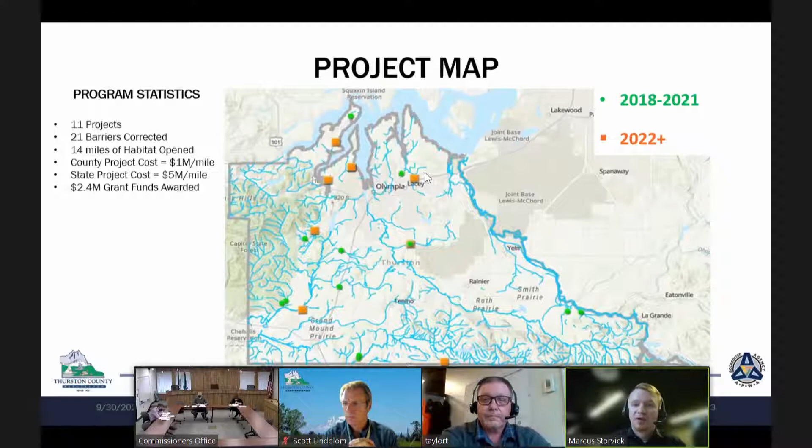We're going to jump into the 2018 to 2019 projects that we did. To give you an overview of what we'll be talking about, we'll use examples of a perch culvert, velocity barrier, and an undersized culvert on projects we've already constructed, to highlight the common problems we see across the county.

From 2018 to 2019, we were able to complete 6 different projects. The first example, as Trevin alluded to earlier, was a perch culvert at Hunter Point. You see Trevin standing down there underneath the culvert. That was a total blockage - there's no way fish can jump up through there, and this was considered a barrier.

That picture on the left is actually circling the same barrier you saw on the previous slide, but now you get a sense of the scale of the solution we came in with. This was Hunter Point, constructed 2018, and we came in with an 80-foot long prefabricated bridge.

The prefabricated bridge is a great solution for these perch culverts - one of our most favorite solutions, just because it allows a lot of daylight for the creek. These are great structures that last anywhere from 70 to 80 years. Great for low volume roads, which is a lot of these culverts are located across the county, and are just a great cost-effective solution for these problems.

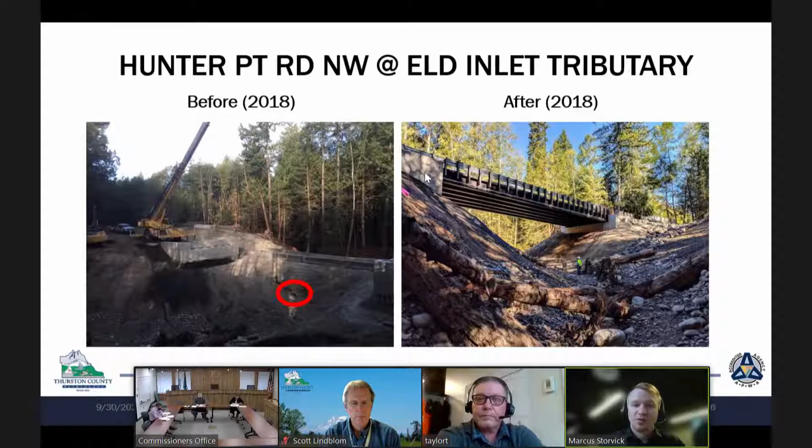Now, as Marcus alluded to, daylighting allows growth. Here we are in 2021, basically the same location, and now you can see the second growth that will someday become a riparian zone, just like the one behind the bridge. On the right side, I want to point out we had a great recruitment of natural alder that's going to help keep that bank even going faster.

And if you're aware of how fast alder grow, it's going to look much different even the next time we get to show you this presentation and an update of this site. Once again, I want you to notice that now, you might not be able to tell right away, but a lot of that material is now starting to recruit downstream, and wood and other materials are now getting into that stream.

And where I was standing previously, where all that sediment was, is now a great spawning gravel area. Now fish can also, at the right time of year, go up and down the system. So don't let the dry stream fool you - it's actually working the way it's supposed to. And how do we know that?

Before we get to that, one thing to point out is on the bottom right, you'll see the $1.6 million price tag. On all these projects, we'll be showcasing the total project cost - that's construction, design, right of way, everything that takes to get this project done. So in this case, $1.6 million.

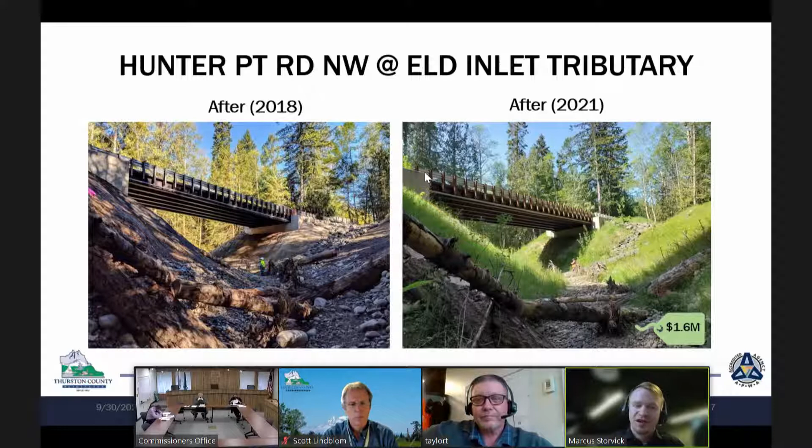But to go back to what Trevin was saying, here's that evidence. We have a video that a lot of you have seen before that is actually the first run of COHO salmon going under that bridge in 100 years. And we know it's over 100 years because we actually found the survey data from when it was filled in from the railroad. Now, this was my favorite picture, my favorite video that we'd show in this presentation, but I think it's surpassed now.

So what we're looking at now is mission accomplished. We're actually meeting the grandchildren, is what I've called this picture. What you'll see over Elena's shoulder is actually now upstream from Hunter Point, and what you see her looking at is a stream that has been created because that material can now properly go downstream. Inside that stream is rearing coho.

So the rearing coho are the offspring from some of those fish that we actually caught in the first year they went through the system. This is really about as good as it gets. Now, the beauty of that stream, it goes up into this wonderful wetland way up on top that has lots of diversity to it. So, like I said, you build it, they will come is one of the things we've said for a lot of years. And this here, we're going to have them coming for generations to come.

Moving on from Hunter Point, these pictures show the Peissner Road at Toboton Creek project, constructed in 2019. This is an example of undersized culverts. On the bottom left, you actually see three culverts lined side by side, which were the existing barriers, nicely framed in with the new structure. This was an open bottom aluminum box culvert, also called a three-sided structure because it has no bottom.

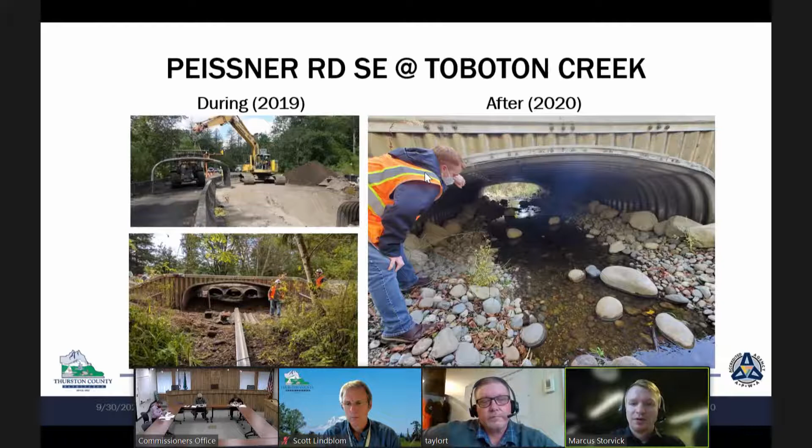Here's a great shot for before and after. Two years later, it's a really ugly looking picture on the left, but on the right you see that vegetation is already starting to establish. The creek is still flowing, and it's just really coming together nicely.

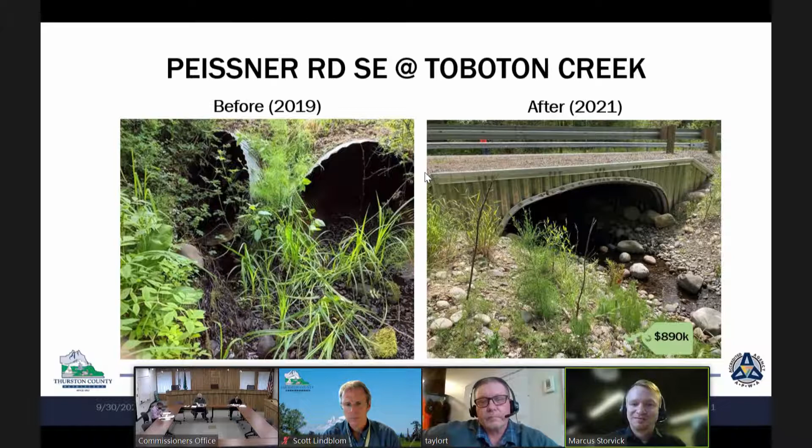So, velocity barriers. This is Waddell Creek, one you've seen before. The picture is actually taken from a video. Due to restrictions on Zoom, we've tried to show the video before and it's chopped up. But Marcus, in the red there, you can actually see a full-size coho trying to get upstream.

This is a full-size fish during high flood. Scott Lindblom caught this years ago, and as the story goes, he didn't even realize he had a fish in the picture until he got it back on the computer. This video has been pretty famous — we've shown it from California to Washington. In the video, the fish tries to hit that water, gets blown backwards onto the rock, and there's basically a mass of white water.

The other problem with undersized culverts like this is that we end up with a backwater, which can then create flooding, as happens here at Waddell Creek from time to time. That water then goes over the road and can transport all the materials from the road into the stream. So we get fixated on fish a lot, but these projects can lead to some great water quality fixes as well, and this is an example of that.

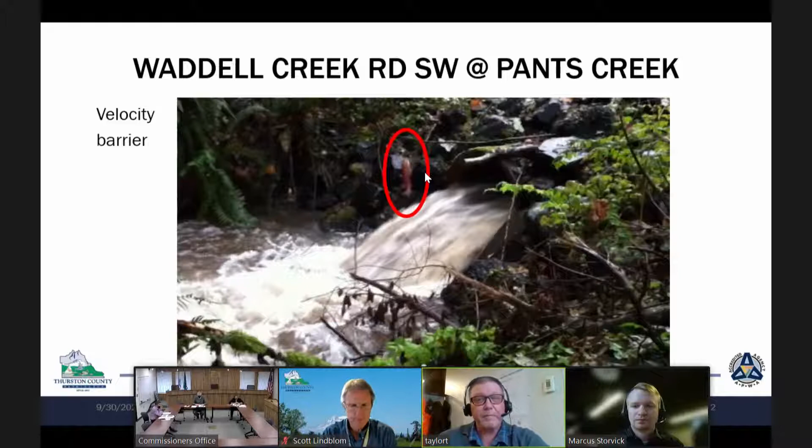Now, same exact flood scale, but this is with the new culvert we put in. This is aluminum — the first aluminum culvert actually put into the county. It has a hard bottom due to soils; Marcus will talk a little more about that. But the fact is, now you can see that the white water, the boiling water from the sides, the velocity is down. This is the same exact flood level now with the new culvert in place.

And once again, no water going over the road, and fish can go back and forth. Happy to report we have fish rearing upstream of this site as well.

Another mission accomplished here, and you can start to see the before and after — this is actually the exact same angle shot. You can see the light pole in the background there of the same angle. As Trevin was mentioning, in this case it was a four-sided structure; we like to find the right structure for each site. In this case it was a soils issue, and the four-sided structure allows a little more stability. So you can see we provided three different examples: a prefabricated bridge, a three-sided culvert, and now a four-sided culvert.

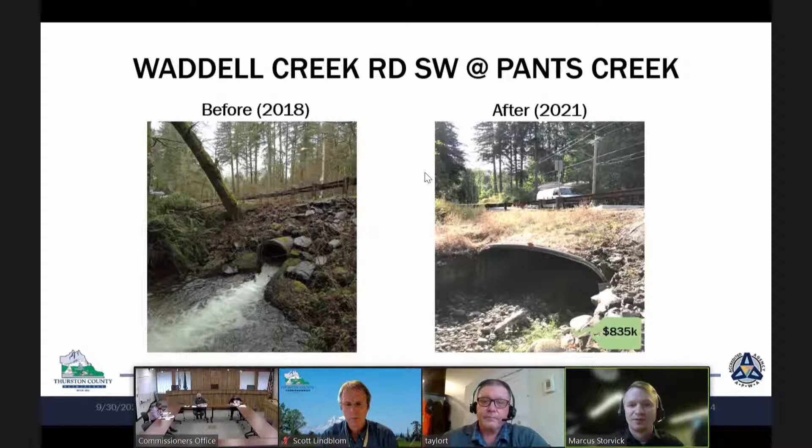Moving on, a quick overview of the 2020 construction season. We were able to complete three different projects last year. The first one up was Peissner Road at Elbow Lake Creek.

This one was a velocity barrier there on the left. It also recruited a lot of sediment and material upstream that was not able to get through. This was another great opportunity for us to come in and do a prefabricated bridge solution, 60 feet long, there on the right. Another thing to point out with this project is we actually received, I believe, an $80,000 grant from the Nisqually tribe. So you'll start to see that we try to leverage as much REAP funding as we can to get additional support.

The other project last year was the Case Road at Beaver Creek tributary. There on the left, you see our model, the traffic engineer, Matt Unsman, pointing to a pool of coho that are just downstream of that existing barrier.

You can see the rebar poking out of that concrete culvert. It's broken and prohibiting the passage of fish upstream. On the right, from the same angle downstream, is the new 16-foot wide open bottom culvert we replaced it with. We got a $500,000 grant from the Fish Barrier Removal Board, and this project has already received a general contractor award for excellence, with a nomination for an additional award. We hope to get this one on the trophy shelf soon.

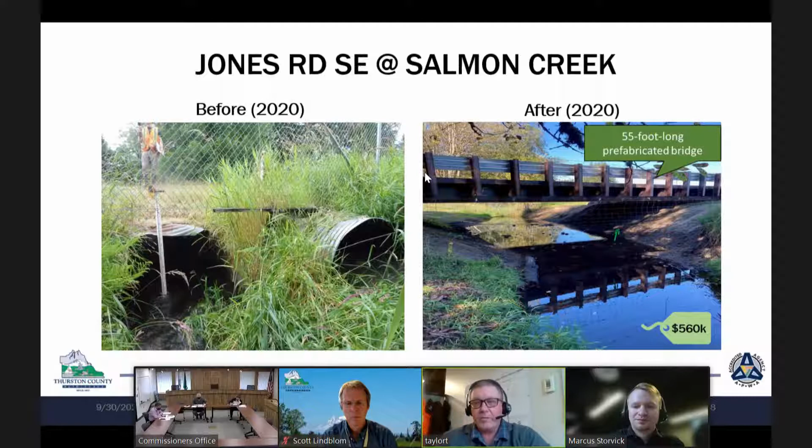Once again, this is one of our prefab bridges. They have a lifespan of 50 to 75 years. We call this site 'Don't Judge a Book by its Cover.' We knew we had anadromous fish there, but it had another story waiting for us that we did not really expect.

When we find something like this, we have to do some adaptive management. The old way of doing things was just to throw in more salmon gravel and try to make spawning ground everywhere. If we were to do that, we would actually limit that priority species. For instance, the Olympic mud minnow, we would create less habitat for a species that needs it.

In this case, we had very viable habitat, found it to be an extremely productive stream, and it really surpassed all our expectations. I actually moved fish daily for about 2 weeks because they were so aggressive about getting back into the site. Pretty amazing little side story that we didn't expect.

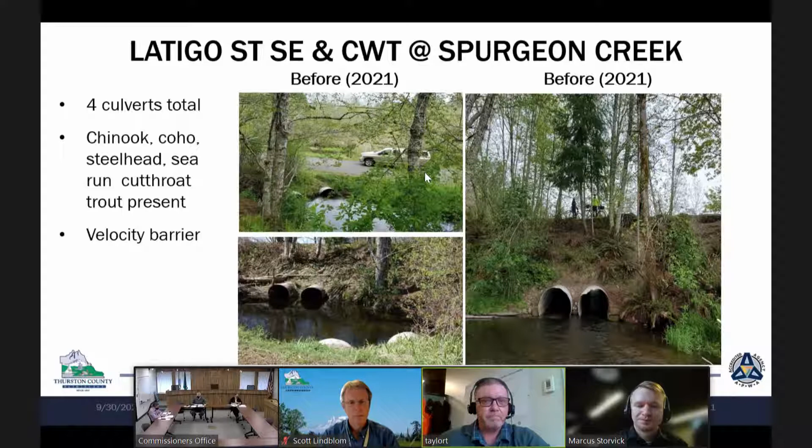I wanted to make sure we got a good shot of the scale of the culverts. Back on Latigo Road, you see the 2 culverts that will come out next summer when we do phase 2 with the 65-foot bridge, to give an idea of the scale of what the stream will look like and the opening it will create for fish and other species. We'll get a really good shot next year standing on the county road looking downstream, and you'll be able to look right underneath that trail bridge.

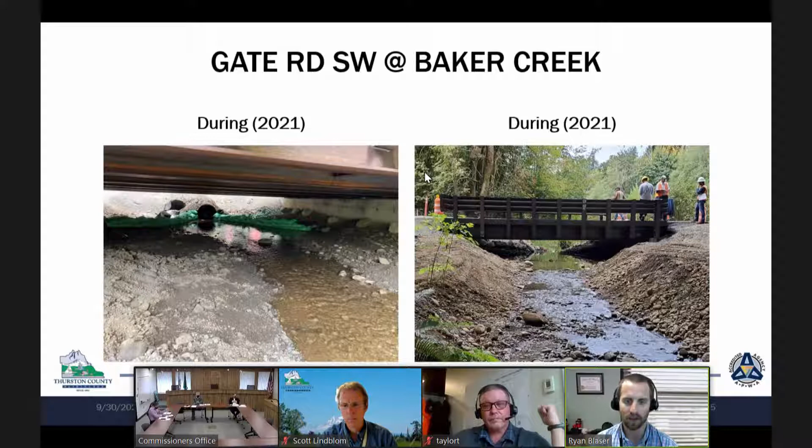We've been constructing this one, as you can see here on the left. This is under the 28 by 28 prefabbed bridge that we installed. You can see the bridge up on top, the stream going through, and then the existing, or previous, two culverts side by side, just to show how much we were able to open this one up. On the right, this is downstream looking upstream. You can see how much of an impact opening that up gave us at this location.

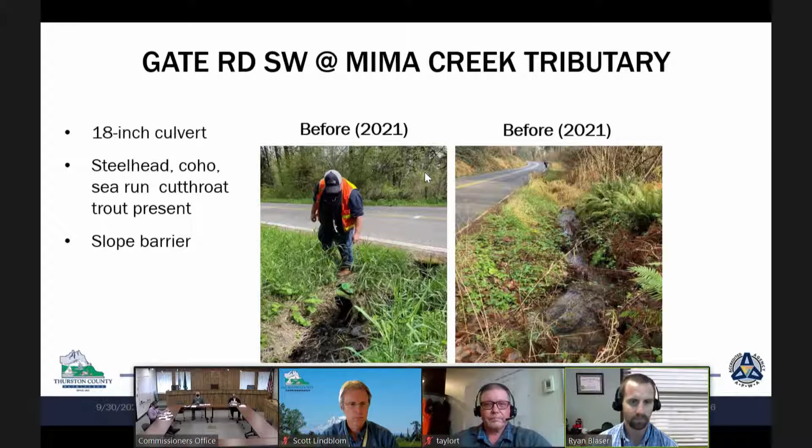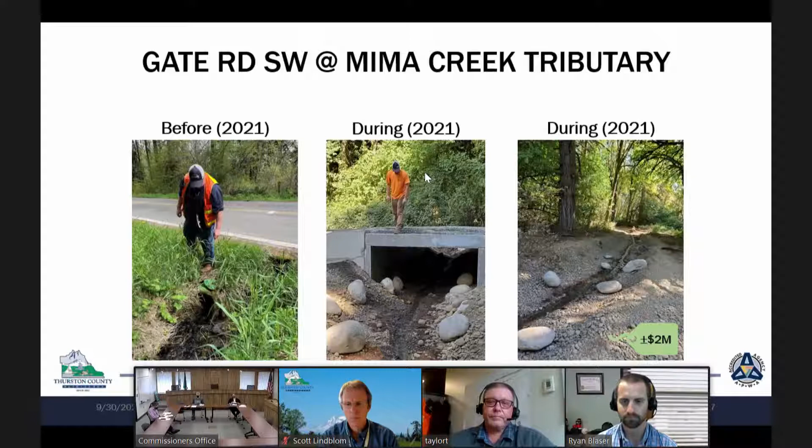Just to reiterate, these projects are fish projects, but they do benefit a diverse set of fish and wildlife. Just on the Gate Road projects, for example, we found these three species of anadromous fish: rainbow trout or steelhead, cutthroat trout, and coho. These fish were relocated prior to construction.

We also saw terrestrial animals during the construction of these two projects, including elk, black bear, river otters, birds, and deer. The Gate Road projects, like Ryan mentioned, are kind of special because they were located adjacent to that newly acquired WDFW conservation land, so we were able to work in cooperation with our restoration piece. It's these kinds of projects and partnerships we form that can help us in future grants and future projects, so they're really important.

One little tidbit on that: Fish and Wildlife is basically already wanting to work pretty closely with Elaine and I on our little off-channel section there to enhance it for the Oregon spotted frog, an actual federal endangered species, one of two special endangered species for Thurston County. So we're actually providing habitat for ESA-listed species as well, which is a very unique opportunity for any project anywhere in the U.S. Yep, definitely secondary benefits to our program.